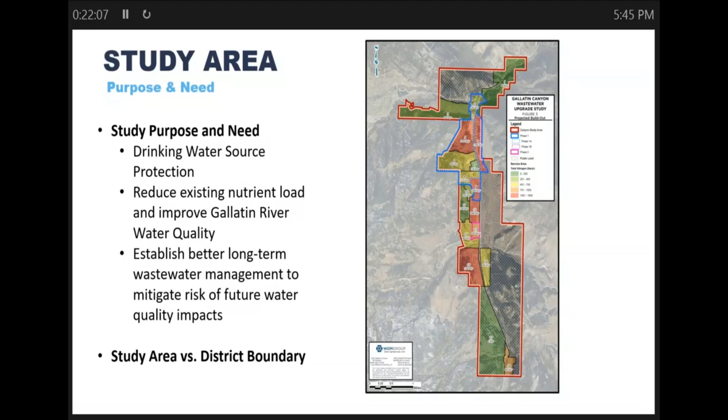I will circle back to our district boundary recommendations, but I'm going to keep it at the high level for now. The land use aspect of this, the main reason I'm presenting these stats is to show the nature of existing development. We had residential parcels at 262 covering 1,064 acres. That's roughly 1 per 4 acres, so very low density. The other stat I want to emphasize is this raw land. There's 4 large parcels totaling 575 acres.

The reason I bring those out is for comprehensive high density development, it's really those raw land opportunities that can facilitate a smarter growth strategy, where these 262 parcels, if they're already divvied up, the opportunity for best use of lands and water conservation and reducing sprawl, those opportunities tend to go by the wayside once they're subdivided and dissipated.

Permitted systems, we took an inventory of Gallatin County database, had 62 permits at 113,000 GPD. They let us know that they probably didn't have everything. They did have the big systems, the community systems, and I'd say 90% of the flows and loads are probably in 10% of the systems. So their database had the big ones, but we did some ground truthing through primarily aerial imagery to up that to 125 total systems, up to about 115,000 GPD flow. Based on average day flow and load estimates for those, we're calculating about 4,600 pounds per year nitrogen going to the aquifer.

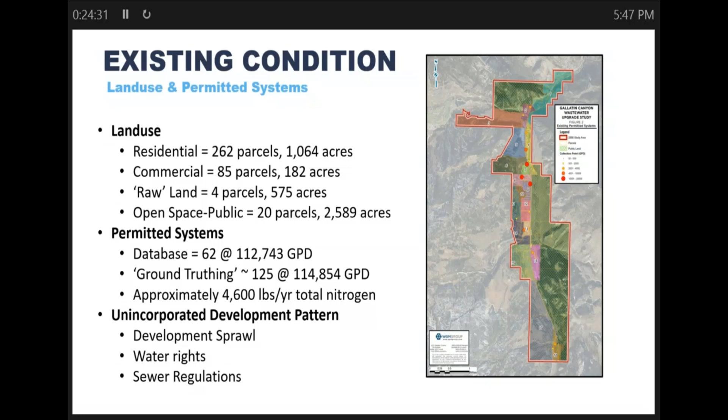This is building off that 4,600 pounds I mentioned to you before. We're kind of throwing an error bar of about 1,000 pounds per year, saying it might be as low as 3,600, might be as high as 5,600.

I'm getting a 5-minute and I need to cruise.

Recognizing there's a lot that goes on in the aquifer. There's denitrification, there's dilution, there's aspects that may drive that number down, but there's also loading aspects of systems performing poorly that could drive that 4,600 number up. So we've got an average day flow on those permitted systems estimated about 97,250 GPD. Existing load, and what we're here today is look at ways to reduce that load, ideally cut it in half or more.

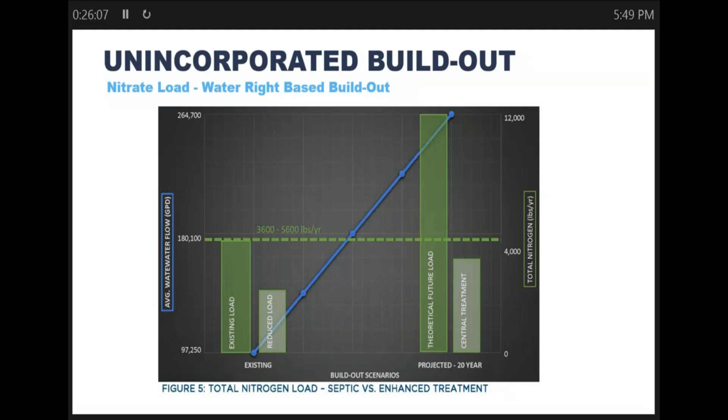Under a projected 20-year build out, again, this is unincorporated, so we looked at water rights and how that really limits your max growth potential. There's still substantial growth potential, but we calculated about a cap at I think it was 264,700 GPD of growth, so double to triple the potential of existing conditions, but recognizing that water rights do represent a fundamental cap in this canyon. In my interpretation, unless water right regulations change in the future, or if we get creative about how to navigate it. But under an unincorporated growth scenario, you're looking at upwards of 12,000 pounds of septic systems going to the aquifer. Whereas in the central treatment, you can handle that growth and ideally mitigate to below existing loading.

So, growth projection. This growth projection serves as kind of our basis of design for infrastructure. Permitted flows, as I mentioned, roughly 115,000 GPD. We looked at various metrics for growth. The 2008 study identified X number of permits at X GPD, and we compared that to present day. And based on a permitted situation, 3.8% growth in the canyon area.

Looking at Big Sky Water and Sewer District stats, their last 5 years showed about 7% growth on an SFE basis, single family equivalent. On a flow coming out of their plant, they're showing about 5% growth, so 5% flow growth. So we landed on a design flow using a 20-year projection, going 5% off of the permitted flow. I would argue that permitted flow is roughly a max day estimate, so we're conservative on our base because that's kind of a larger number than average day.

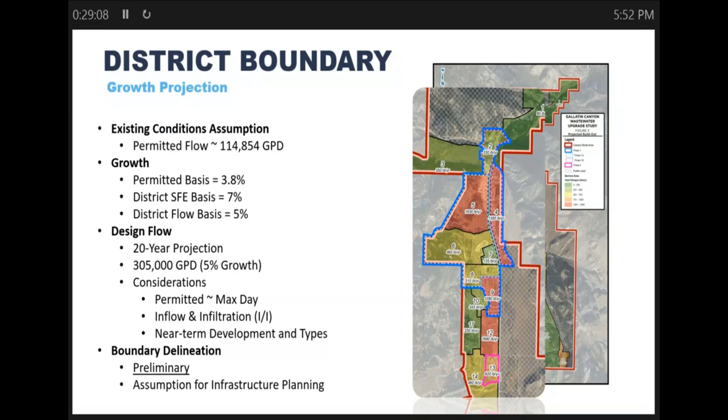We identified some raw land areas that have some near-term development planned. And again, we're trying to grab some of the larger existing loaders. The red area generally shows where either near-term or existing loads are concentrated. And it's a balance of cost of collection versus how much you're pulling out. And that's kind of our basis for that preliminary district boundary recommendation.

From there, I'm going to introduce two scenarios that Scott will elaborate on. Scenario one is really a go-it-alone scenario, a canyon treatment plant somewhere in the north end of this zone. Scenario two, I call that the co-solution with Big Sky, the existing Big Sky district. And the strategy there is the sum might be greater than the parts. They've got an existing plant, they've got existing storage, they don't have great disposal options, but they have excellent treatment. So that plant, those benefits potentially create a win-win solution.

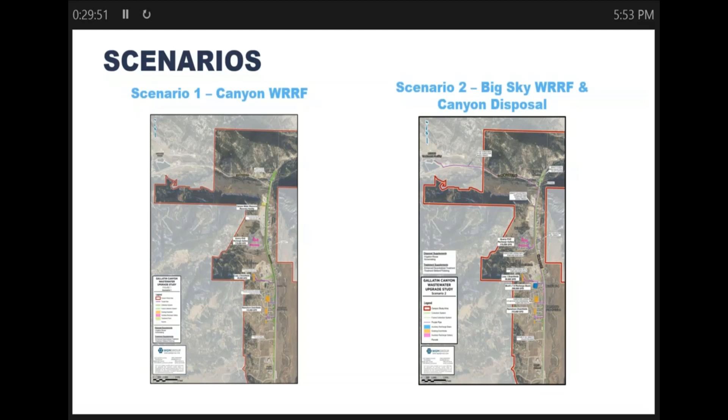I think I am ready for our first set of questions. Great, so we're going to take questions after each section. As Mace said, he's going to take it. We're just going to do this for a few minutes, but there'll be more opportunities at the end to stand around, talk with us, look at the maps. Thanks, Mace. You want to take it? Yeah, and if there's no question, I'll move on.

But go ahead. I'm just wondering, because it's not clear on the map, where you project the southern end of the boundary will be. So again, we're kind of identifying... This is showing projected loads on a 20-year growth, but we do know on our existing loading map, the Ramshorn subdivision has a notable density. They're actually the higher density development area for residential. Some existing commercial loads, old septic systems along the east side of Highway 191.

But right now, that's kind of our phase one concept boundary, but planning for in the future having adequate collection to extend that boundary to, say, we're showing phase two down at Ophir School, recognizing that the school is growing at a rapid pace, and that'd be a logical phase two, or even rolling into phase one if the dollars make sense. And Mace, can you restate questions? Otherwise it won't record. Okay.

On the next one. So where on the map is Ramshorn? Ramshorn is this service area now.

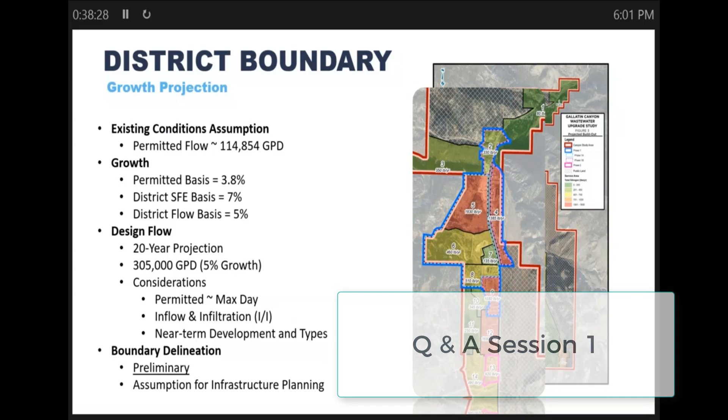So that's the transition to Scott's. I'm a map guy. Scott's a table guy, so be ready for it. That's not fair. Maps are way more fun than tables,

but I'm going to drag you through some infrastructure costs, and I want to talk a little bit about cost estimation beforehand. Just to say quickly, we'll give another one of these in early April where we'll take these infrastructure costs and these O&M&R costs that we're going to show you tonight and try to develop them into something real for you, which would mean connection costs, annexation costs, and what it means for you. So these costs are going to be for the total project and somewhat difficult to wrap your head around what that means for me if I want to join the district.

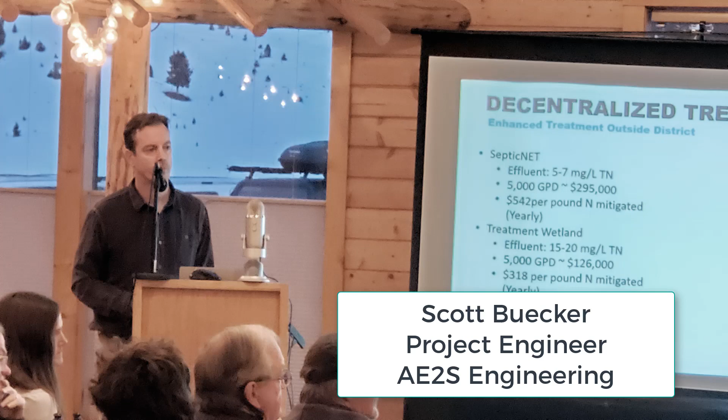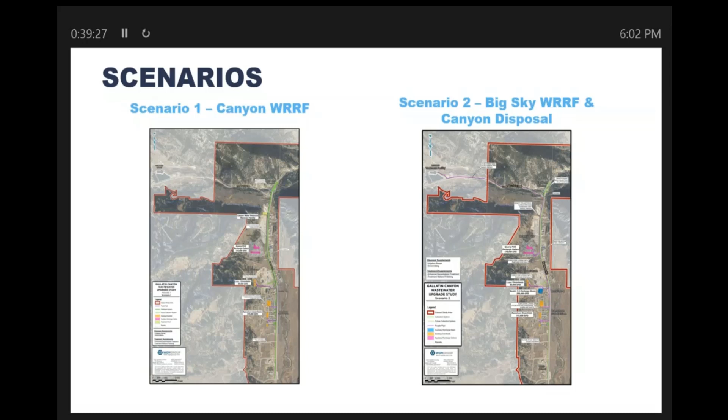But 2 scenarios. Scenario 1 is going to be go it alone, as Mace said. Think about that as one man against the world. Scenario 2 is joining, coupling with the district and pumping your wastewater up there. That'll ride throughout this presentation. Cost estimation. When I give you numbers, they'll be total project costs. So not just construction costs, but also the cost to design it, to permit it, construction admin, the whole 9 yards. Versus when we say construction cost, that's the cost you'd expect to see on a bid day.

Accuracy, we're operating under the Association for the Advancement of Cost Engineering. It's sort of a standardization of cost estimation. We're at what we call a level 4, a feasibility level, where we're not doing concrete takeoffs. We're doing parametrics, looking at recent projects that have been built. We are getting budgetary cost proposals from manufacturers of equipment when it makes sense. The level 4 standard allows me to say that my cost estimates are accurate to minus 30% or plus 50%. That's always been a hard pill for a client to swallow. We try to do a little bit better. In the report currently, we're saying minus 25, plus 35%.

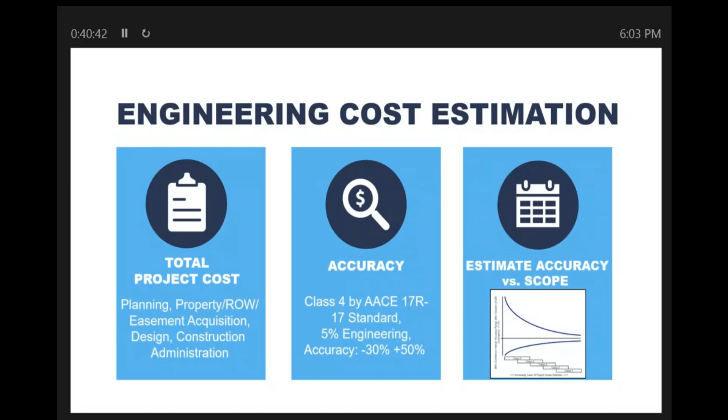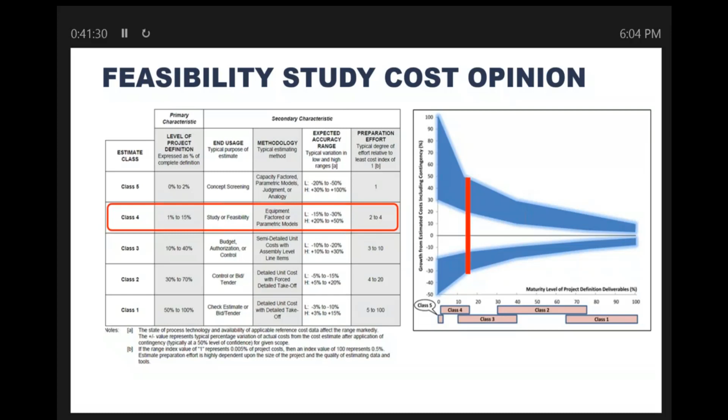And as time goes on, we're able to get more accurate, which is what the bars on the right are showing. This graph is showing your cost estimation band width as you progress through design. We're in these early stages here with about 15%, so our band is still pretty wide. If this project has legs, we'll go into a next phase, which would likely be a preliminary engineering report for DEQ submittal for funding application, et cetera. And we'll hone that in, with the ultimate goal being when we're putting projects out to bid that we might be plus or minus 10%. So you got to be patient with this process. It's not meant to protect the engineer, it's meant to protect the client from marching into a project that they may not be able to afford.

This is where we would be in the next phase, if this does have legs, if the vote on May 5th is successful, for example. Then we'll be able to start honing this in with better design applications for additional funding sources. This is large infrastructure that you're not going to finance with cash. You're going to get 20, 30, sometimes 40-year notes on these projects and finance them. And forming a district gives you that capability. If you don't form a district, you can't get that money.

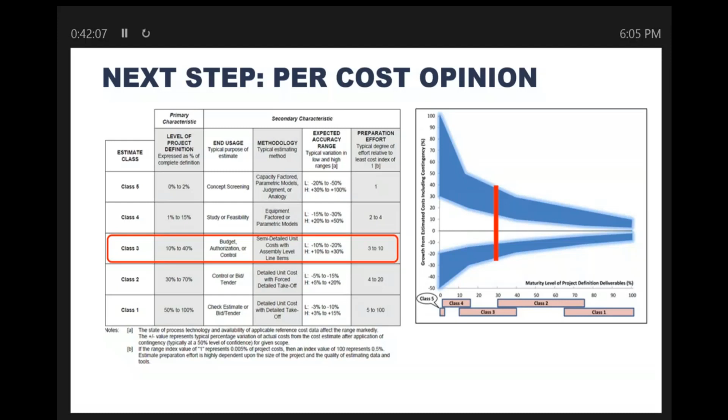So with that, just a high-level view, this is all going to be in the report if anybody's interested in the dirty details. But the canyon area collection system, roughly from about 1,000 feet north of 64 to capture Bighorn Center, with collection mains on both sides of 191, coming to a lift station somewhere in that vicinity of Bighorn Center, pumping underneath the West Fork through a bore and catching it on the south side of 64.

From there all the way up to Ramshorn and Ophir School District, we can do gravity. So, somebody asked about location of the treatment plant. Ideally, it would be around that 64 and 191 intersection, because then you can take advantage of all this slope that you have and not pump wastewater but once. And that would be, like I said, on the other side of the 64 intersection.

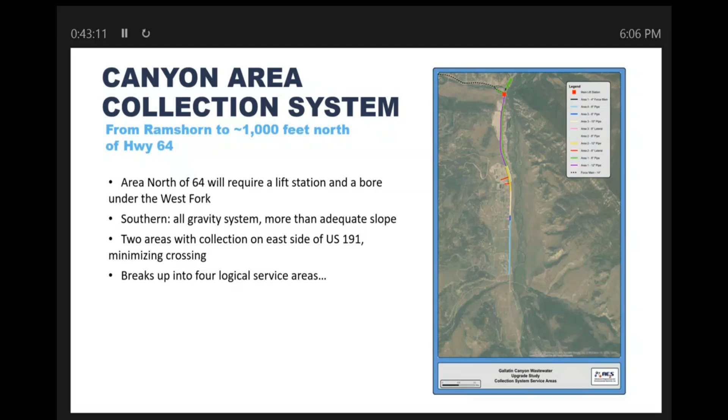It breaks up into sort of 4 logical service areas. Like I said, that first stretch, Bighorn Center, north to about the north end of Lazy J or Straight Iron Road. That segment's a little bit more expensive because it's a little bit more networked. It does have that bore, it does have a lift station, does have pipes on both sides of 191. So that chunk would be about, we're saying $5.3 million. And you caveat that with minus 25% plus 35%.

Each subsequent section is a little bit more inexpensive because it is gravity. We are not having to reach up into these hills a long way, so our laterals are not that long. These costs to me were pleasantly surprising after reading the 2008 study. It was all about 1, 2, 3 MGD sorts of wastewater generation and capacity and treatment, to where Mace landed, which looks like about 300,000 gallons a day. You've got peaks associated with that and such, but we're talking a whole order of magnitude smaller infrastructure, so it becomes a lot more tenable. And that was, to me, a very good outcome of the planning part of the study.

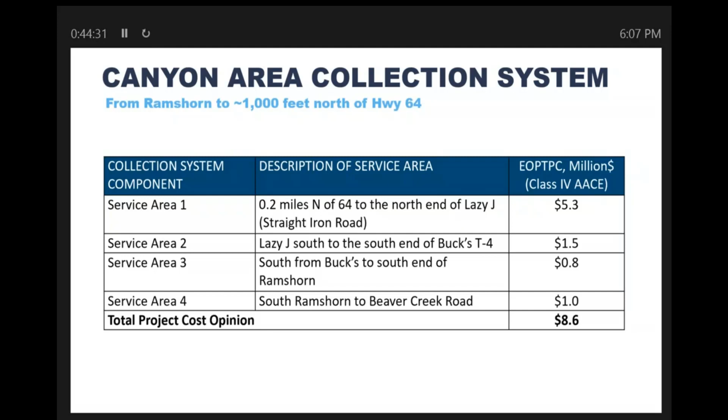And we can come back and spend more time on cost estimates later, but I don't want to belabor them, but I want you to see them. This is what we call OM&R, so operation, maintenance, and replacement costs. The replacement aspect is how you should be funding infrastructure, so you're collecting money over the years so that you have enough money to replace that infrastructure when it's expired or no longer of use. That's how Big Sky County Water and Sewer District does it. Not everybody does that, but that's a textbook way to do it. If you don't do it that way and you need $30 million of infrastructure in 25 years to replace what you had, you're at the mercy of USDA and SRF and state and federal governments.

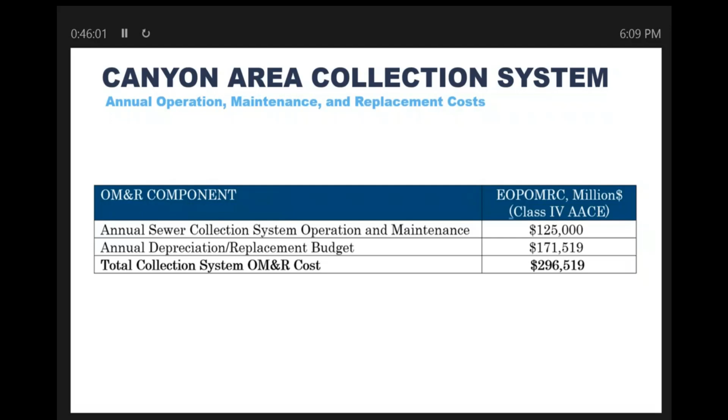The annual sewer collection system operation and maintenance. So this would be what the Canyon Area District would do regardless of scenario 1 or scenario 2. You would have a collection system that you would own and operate, and you'd have to pay somebody to operate that system, meaning go chase clogs, go do inspections, go do periodic cleanings, and that's the bulk of that $125,000 there. The annual depreciation and replacement budget would be about $171,000 annually that you would want to sock away so you can replace infrastructure when it starts to fail. So your total is just the sum of those, and it's about $300,000. These numbers might move a little bit between now and when we stamp this thing and put it out, but we're generally pretty close. We're not expecting any large swings at this point.

So that, everybody clear, covers the collection system that would be the Canyon Area District's. No interaction with anybody else. But what you do with that wastewater after you collect it and get it roughly to that 64-191 intersection, there's two options. One is you build your own treatment plant as close to that intersection as possible. The upper right photo is the River Rock wastewater treatment plant that Ron operates. That's about a 200,000 gallon per day system. We're talking about a 300,000 gallon per day system, roughly in that same ballpark scale. That might be what it looks like at the end of the day, just to wrap your head around that.

It is Big Sky, so we need indoor facilities, we need odor control, we need nice architecture. So costs do tend to be a little higher up here, not just for that reason, but because it's really hard to get at all these trades and get good competitive bids from contractors that are capable of building this type of stuff.

This would be owned and operated by the Canyon Area District as well under scenario 1. So you are taking on wastewater treatment for perpetuity at that point, really. Unless one day you decide to pull the plug and you can work a deal with Big Sky at that point to take your sewer. But you're staffing this, you're operating it, you're signing the discharge permits monthly, it's all yours.

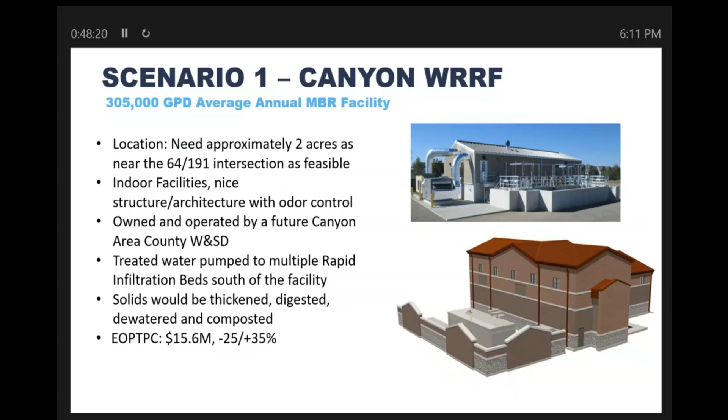When you see this EOPTPC, that is engineer's opinion of total project cost. We're sitting at a little over $15 million for that facility right now. Where that site ends up and whose property and how much we'd have to pay for that property is a big piece of that. So just keep that in mind. That's why we have some of those large accuracy bands at this point.

We chose the membrane bioreactor. That's where we landed for the phase 1 expansion of Ron's plant. It makes a lot of sense at this scale. Like I said, that River Rock plant's down there cranking out some great high quality water. It works really well at this footprint.

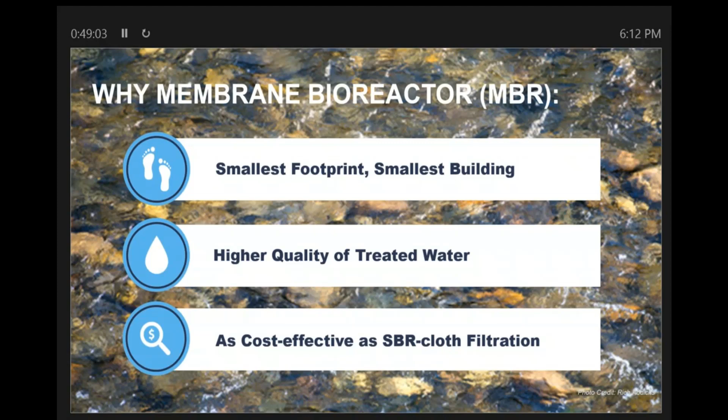You can get it indoors, and you can do just about anything with that water in terms of reuse. After you're done, it's a Class A-1, so it opens up all sorts of uses, from snowmaking to irrigation to putting it in the ground potentially. And it came out about as cost effective as SBRs, which is what Ron has now, backed by cloth filters, which would be more difficult to operate.

Scenario 2, conveyance to Big Sky. So this would collect all that wastewater down at a lift station that, if it all works out, we put out in the front yard there of Conoco. We've talked to them. They're open to the concept, but this is not set in stone either. This is just feasibility level study. So we'd have to construct a lift station there that would take Canyon Area wastewater and pump it up to the Big Sky County Water and Sewer District through a force main.

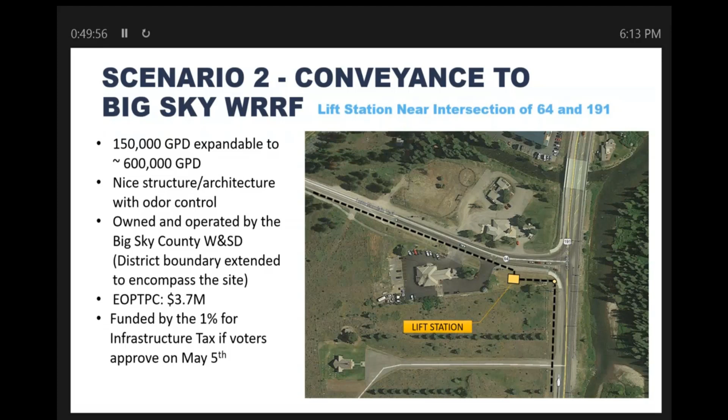The opinion of cost on that right now is about $3.7 million, still within that same bandwidth that we've been talking to the resort tax about, $4 million. That's all going to get asked of the voters to approve for collecting that with the 1%, and this lift station would be paid for if the voters approve.

The force main would be a 12-inch main at this conceptual design level, about 9,600 feet up Highway 64. That would be owned and operated as well by the Big Sky County Water and Sewer District, same as the lift station. That was part of the interlocal agreement with the resort tax. More detailed alignment study would be needed in the PER, but this is good enough for conceptual level cost estimation. And that would also be fully funded if the 1% additional resort tax is approved.

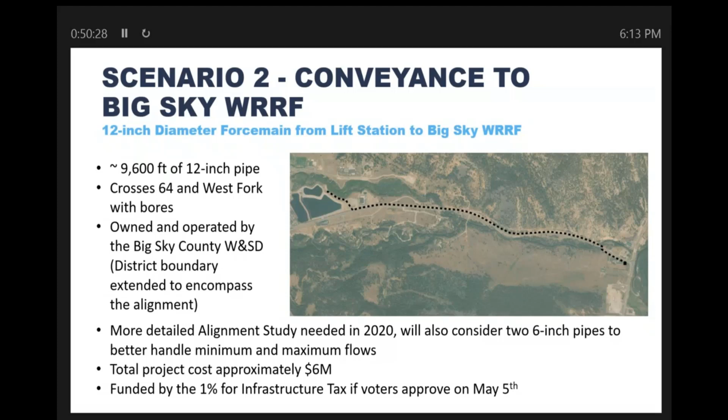Switching gears to the treated water, and I'm going to cover both of these because they're on the same slide. Scenario one, where the canyon goes it alone, as I described, we would pump treated water from that treatment plant back up the canyon to rapid infiltration basins and reuse. If you formed a district and had an agreement with Big Sky County Water and Sewer District to take the wastewater and treat it, you would have effluent treated water coming back down the canyon.

That line would be a 16-inch line with the goal of preserving as much of that pressure as we can and drive it back up the canyon for discharge to those same rapid infiltration basins and reuse sites. So bigger pipeline, but to cut down on friction losses and save the pressure and not have to have booster stations along that pipeline.

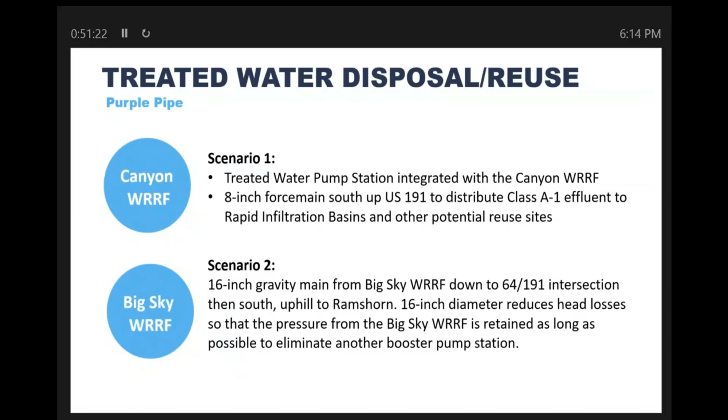Conveyance costs, so like I said, $3.7 million on the lift station, $6 million on the force main up 64. That treated water return pipeline, 16-inch, would be approximately $10 million. It just happens to conveniently break out as about $5 million for the portion along 64 and $5 million for the portion up 191. So what we told the resort tax 2 months ago was $12 million total as a budgetary number for the lift station and the two pipelines.

We're still about right there. That still works. And that's what will be put before the voters on May 5th, as well as funding 60% or $27 million of the expansion and upgrade up the hill. I'm getting waved out of here, so I'm going to quickly wrap up.

Then OM&R costs for those same infrastructures. So these would be owned and operated by Big Sky County Water Sewer District, but you form a district down here, you have an interlocal agreement, you're paying them, in an ideal world, what it costs for them to operate that system. So that would be part of your canyon area residents' rate charges.

And like I said, this is all going into the goal of feeding these infrastructure costs and these OM&R costs to the financial folks, who then will look at how many residents are down here, how many connections, and try to turn it into connection fees and monthly rate charges, so that you all can actually say, well, what is this really going to cost me, not what's it going to cost in total.

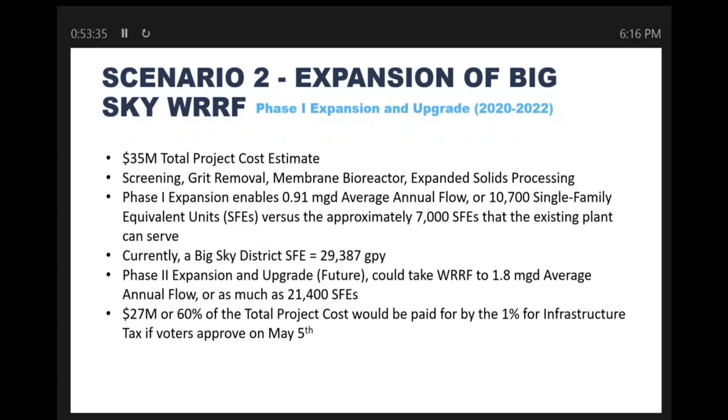Ron's plant, most of you in this room have sat through a presentation I've given already, so I'm not going to touch on it, but we're sitting at $35 million on the estimate. Again, resort taxes said we'll pay up to $27 million or 60% of that project cost. And that was done in large part to say, we will help you quite a bit, but we'd like to see you help get the canyon sewered and get their wastewater out of the ground and treated. That's just the latest rendering of Ron's plant. So that's what a $35 million project looks like.

I know I'm getting waved out, but this is the thing I want to harp on here, is that, as we'll show toward the end, the capital costs of these two scenarios are pretty darn close. If you were just looking at that, you might say, well, hey, we could build our own plant and operate it. The issue is that there's huge economies of scale in not just construction of wastewater and water treatment plants, but in operations. That first line item, for example, is full-time employees, operators.

You can't really have one operator of a plant that's trying to generate Class A-1 wastewater. You need two. What if that one goes on vacation or gets sick? In theory, we like to do circuit riders and back each other up and share operators, but you can't plan for that at this stage. So we budget 3 down here for Ron's plant. He's doing it right now with a lot less, but by the book, that plant, when it's expanded and upgraded, would have 3 operators dedicated to it. But it's 3 times larger, but you only need 1 more person. So those are the economies of scale that I'm referring to. Same with energy and everything else.

So right now, sitting at an estimate of about $800,000 a year to operate that 300,000 gallon per day plant that would be the canyon's, versus maybe $1.8 million to operate that future expanded plant that Big Sky County Water and Sewer District owns and operates. But they've got 7,000 SFEs up there to help you share that cost load, versus down here, you're doing it all on your backs, fewer backs. And that project needs to be built and financed from the get-go. So however many people you start the district with are going to have to bear that load, and you're going to be wanting more people to come on board to help you bear the costs.

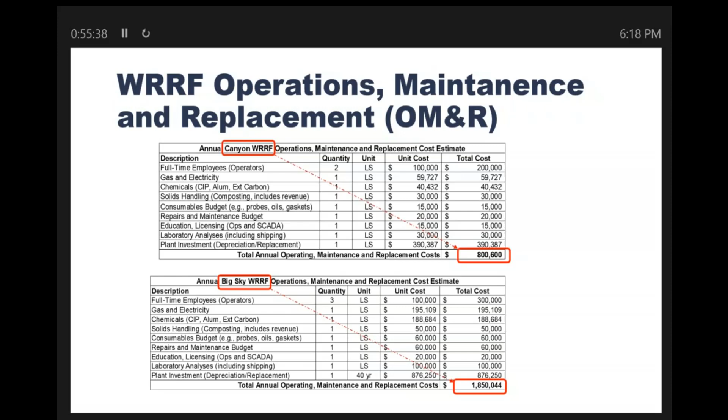That's it. Question? What's the question? Why not expand Big Sky County? So the question is, why create a separate district and not just annex them in?

And it really is kind of a political answer. The annexing district is totally outside of our current boundary. You have to do a vote of my entire district customer and owner base, which becomes very difficult to do. And so you put that out to a vote, and you may get, no, we don't want to annex them in. If the canyon decides to form its own district with an initial list of landowners, it's a much easier thing to organize and set up.

But it's a good question. Questions for Scott? Or Ron? We're happy to let Ron answer all the questions.

Over there. Scott, can you talk a little bit about disposal sites within the canyon? What those might be, what those needs would be? Yeah, especially because May showed one right out back here. We caveat that quite a bit in there. There are many here already that we're hoping we could take over. And when I say we, it would be you, the canyon area, versus going and building a bunch of new ones. Some building of new ones, there looks to be plenty on paper.

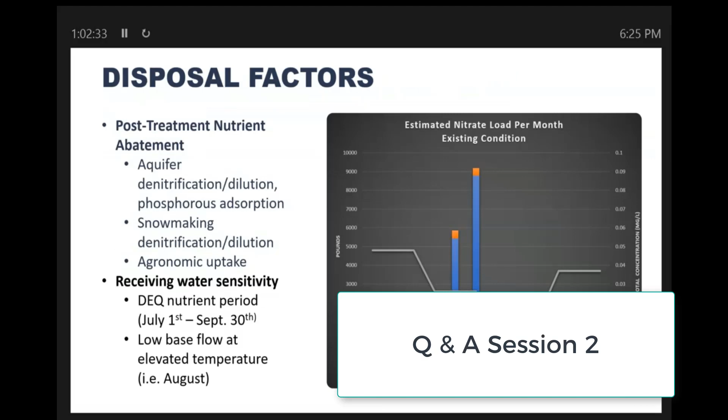That's why. The first slide where you said it was $5 million for that section, because then later you said the pump station up to the sewer district was $1 million. No, sorry. 3.7 for the pump station, and that's because it's on that triangular wedge in front of Conoco. It's going to have to be really nice and look nice.

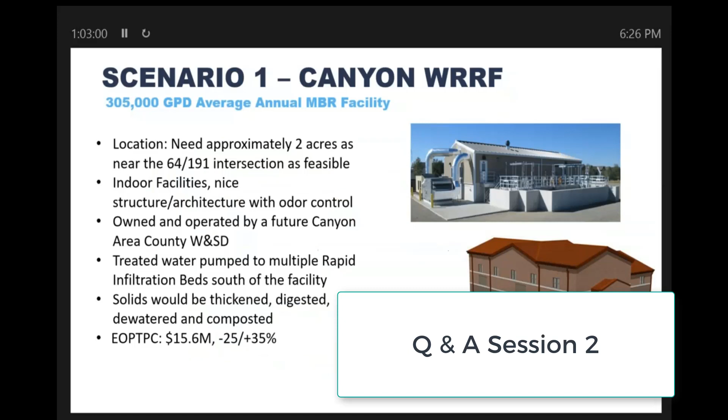And so I guess I didn't understand, but then what was the $5 million one for? Like one of your very first slides. The $5 million is for that first starter collection system, what we call service area 1 or area 1.

Hopefully Mason's going to help us out with summing this up. Yeah. Yep. Great expectations. Questions now, I can talk a bit about the maps too. And Scott, you want to briefly go over the decentralized, maybe, might be good for people. I'm catching that one too in a second. You'll catch it, okay, great.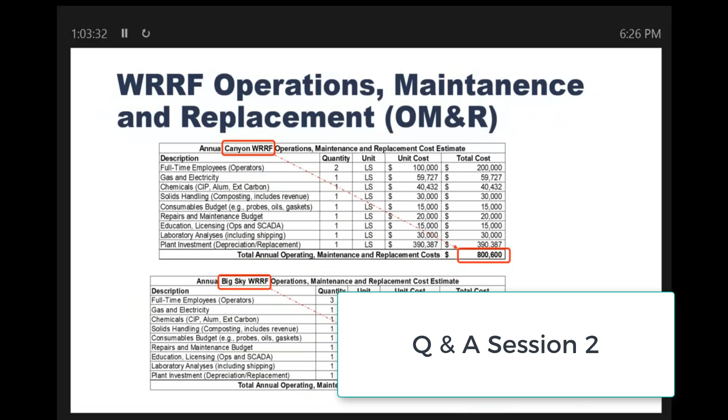Is there an infiltration system? What are options of that? Is that landscaping? The more you landscape it, the less capacity you have generally. The highest capacity would be a cobble rock drain bed, essentially. Well, I meant for using for irrigation. Like can we irrigate football fields at the school? Is that a use, or are you talking about injecting into the groundwater, and how does that happen? Both. We could do both. Putting it in the ground is going to require some more study and some more science, but irrigating ball fields is fine. That's done all over the U.S.

So I have a question. Is this required because of growth, not because of where we are? That gets to that whole discussion of tipping points. Are we a problem right now? We don't know. MBMG's launching in to help us understand that a little better. But as it grows, surely. And a lot of that's already platted. Are we at that point now? You're asking a treatment engineer. That's for the groundwater folks. We've seen increasing levels of nitrogen in groundwater wells in the canyon over time. So we're definitely having...

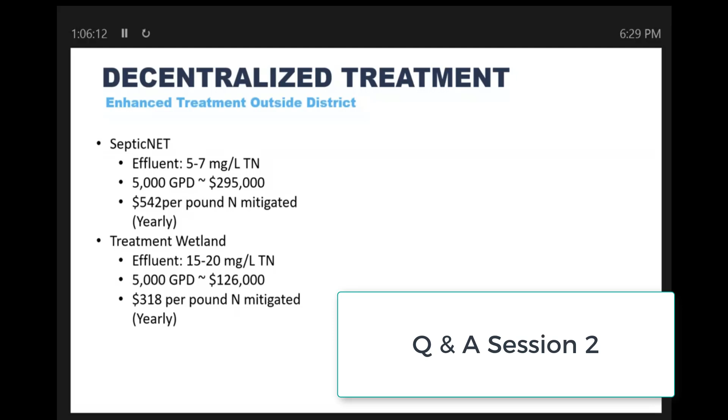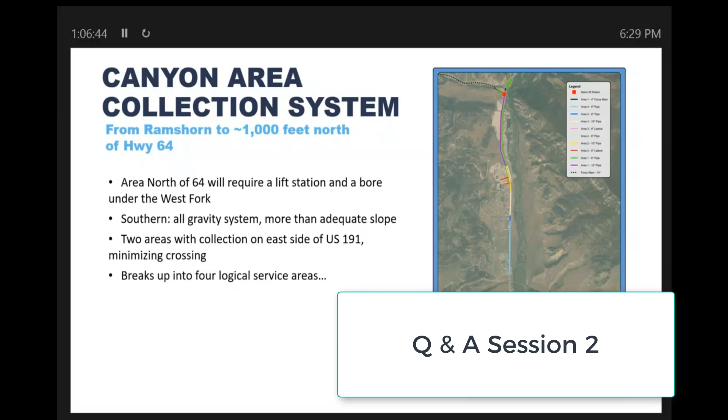Quickly scroll back and see if I can answer that service area concept. I don't know if I can quite read it. I would say that that 5 million number is roughly the purple pipe plus T4, I think, right here. That purple pipe to Bighorn is the base infrastructure that's totaling 5 million. So the 3.7, is that just the lift station or is that the pipe? Does it seem significantly further to get it on?

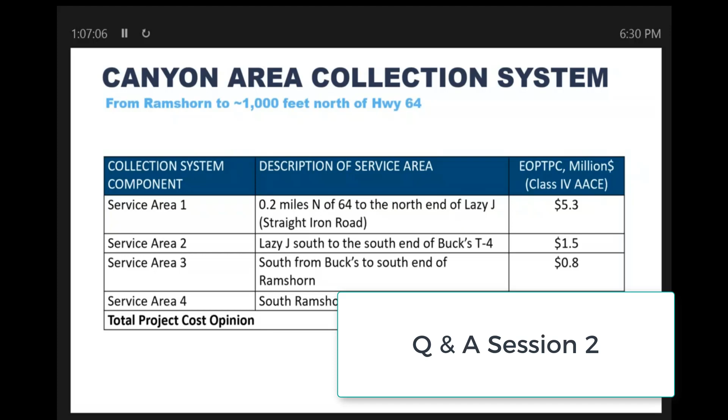So keep in mind that one set of costs was collection. This one's 100% collection, nothing above the lift station to Big Sky Wastewater. So that 3.7 is just for the lift station? Yes, correct. Like I said, that's a deep lift station right there in front of Conoco. It's a tough place to build on, and it would have to have nice architecture, odor control. We like to do dry pit lift stations where the pumps aren't actually submerged in the wastewater, so that's a nice lift station. But it is actually shorter from the intersection to the Big Sky County Water and Sewer District's plant than it is from that intersection to the high school.

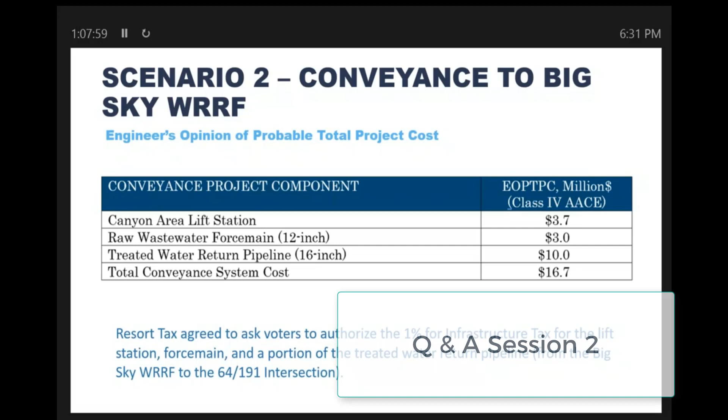It's tougher to install a pipeline in that 64 corridor than it is in 191, so that's why it's kind of a balance of 5 million each. If you're trying to track down that 5 million compared to the $12 million total, I will note that this treated water pipeline includes the purple pipeline from the intersection down to these disposal sites that I'll show you in a while. So there is a $5 million component that isn't part of that lift station conveyance back and forth.

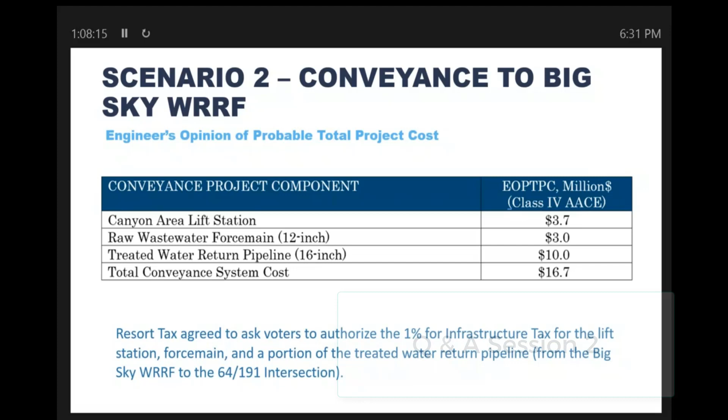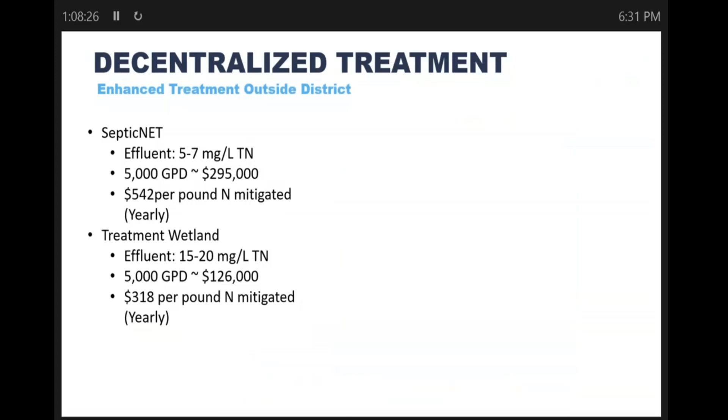So, decentralized treatment. We recognize that there's portions of this valley that are going to be very tough to collect, not economical to extend main. Corral Bar, Rainbow Lodge, every linear foot of pipe costs money. So to take chips off of these nutrient loads, decentralized treatment is a strategy. We did our homework on what we think are two solutions that we would vouch for.

On my drive up, I was thinking I should add a Montana made stamp because these are Montana technologies. SepticNET out of Butte. It's essentially leading edge, decentralized, non-mechanical treatment, getting effluent down into the 5 to 7 range. That quality of effluent comes at a cost. 5,000 GPD system, which I characterize as you'd probably need 5 of those for Ramshorn, 4 maybe, because that's all off a design flow, not average.

So it's not cheap, but it knocks out a lot of nitrogen load, taking essentially incoming effluent at 60 milligrams per liter and knocking it down to the 5-7 range. Applying it to this scale of system, if there's a 5,000 GPD standard system out there, you're able to knock out, I think it's in one of the tech memos, I think it was 800 pounds a year at $542 capital cost for that first year poundage, and you're knocking those pounds out for the life of that technology.

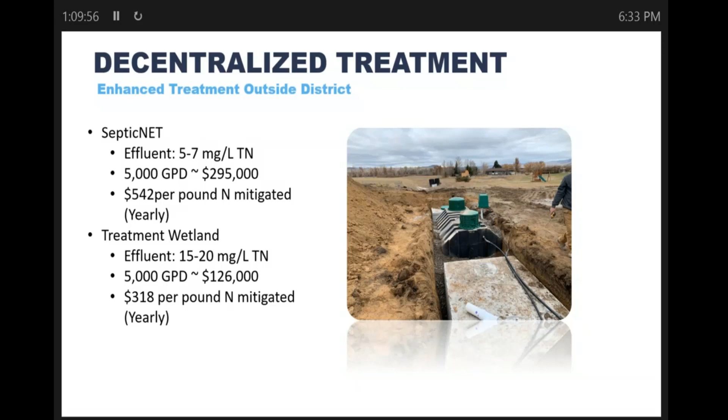Next Montana-made technology, treatment wetlands. Chris Allen, Otto Stein, they worked with MSU for about a decade, proving these concepts out. This is up in Bridger Bowl. It's about a 10,000 GPD system you see in the picture there. And it's worked under the harshest conditions of extreme ski hill loading in dead of winter, so coming in at high loads.

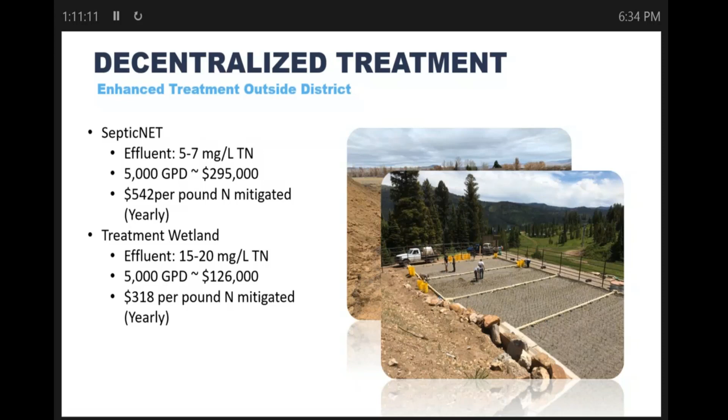For a district, it's not a traditional method of chipping off a bunch and having a district own a bunch of drain fields and decentralized. A district solution is really central collection, central treatment, and the quality of an MBR is 3 or 4, and you're setting yourself up for handling mass collection in the future. So that's kind of the differentiator between the two treatment concepts.

So I'm going to get into disposal now. Little rundown on this graph. This is roughly existing load. We did some mass balance work. We were looking at some stream data upstream of the canyon at roughly the Buck station. We've got this natural load concept of spring runoff carries some nutrients. You've got high flows. So this blue represents a natural load bar that climbs as you hit spring runoff, falls down, and hits kind of more of a base flow from August on.

The orange is the unnatural load, what we were tallying up as, if we take that 4,600 pounds, spread it across on a monthly basis, that's how it stacks up on the natural load. And in the existing setting, that load is basically a chronic load, so it is pretty equalized and loading the stream pretty evenly throughout the year. And the trouble point is really your late summer, August, September base flows where temperatures are high, and that's probably when you're likely seeing algae bloom.

So that's where the river's most sensitive to your load, and it is actually one of the flaws of groundwater discharge, is that it is a chronic load. But if you say we knock out 90% of that load, you're chipping that little orange thing to a sliver under existing conditions. So that factor of timing and load played into how we were looking at our disposal options.

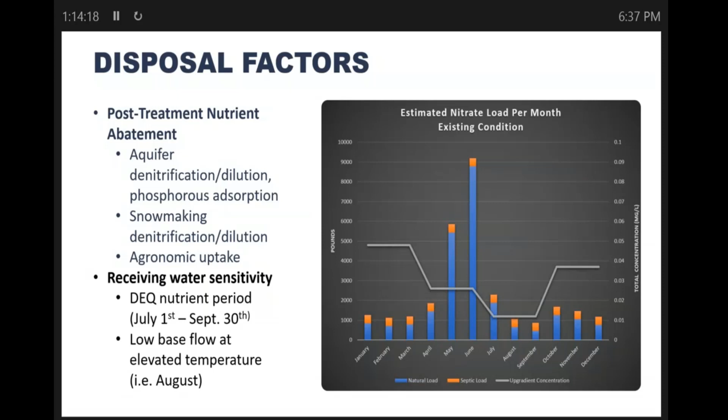I gotta keep cranking and I'll catch answers at the end.

This is our screening table. I'm not gonna cover it all, but I do want to emphasize we did look at surface water, we did look at groundwater, snowmaking, land application, deep injection wells, shallow injection wells. From an overall benefit, overall setting, we're thinking groundwater discharge is cost effective, has nutrient benefits, has recharge benefits, and at the quality of that, we're pulling X pounds out and putting less pounds in.

That's a plus. Supplementary, as Scott described, we're planning on a purple pipe main that essentially feeds these drain field locations. That main's available to use for irrigation reuse. Maybe there's opportunities where snowmaking's wanted for a cross-country course or for cross-country skiing, and there's a duplicate benefit. We did identify that snowmaking as a fundamental mechanism to dispose is maintenance intensive, operation intensive, and isn't a large reliable disposal. It can be done at a price, and if you get dual recreation benefits out of your snow, then it really starts to be intriguing. We're not taking it off the table. We see applications where it's supplementary.

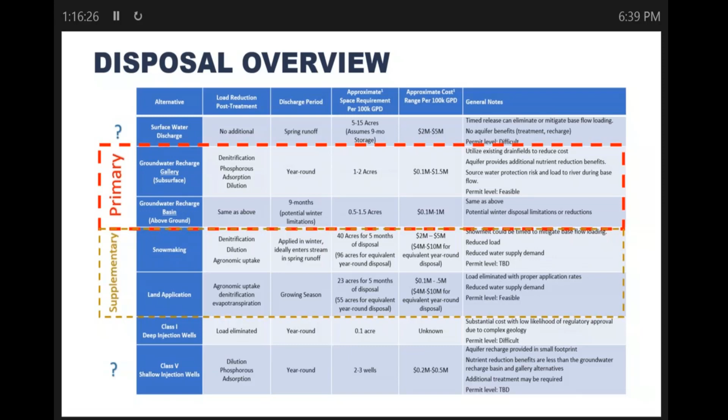Question marks on surface water discharge and shallow injection wells. I put those there as they're still intriguing to me. Surface water, not really in scenario one where the canyon's going alone, because that would require large storage to store through that sensitive period of the river. Whereas the co-solution, or scenario two, where the storage exists and you could potentially pulse discharge out with spring runoff, that's out of the system, 100% moved on. There are phosphorus concerns of, does that translate downstream? And that's the beauty of the aquifer, is phosphorus is eliminated. So still a cost-effective disposal if the storage exists. Pulse discharges, talking to DEQ yesterday, they seemed intrigued and saw the benefit, but point discharges through rivers are challenging.

Where am I at, Karen?

Okay. So disposal infrastructure, I'm going to present essentially both scenarios on the same slide. And like Scott mentioned, we're showing conceptual locations. So the fact that one of those is shown right out here off Bucks T4, that's purely conceptual, but we did identify all the orange as existing drain fields. Given the quality of this effluent, the loading to those drain fields can be approximately triple of what they can do today. Right now, they're trying to dispose of unpolished effluent, I'd say higher BOD, total nitrogen in the 20 to 30 range. So the loading to those is more conservative under current operation.

With the polished scenario, Ramshorn can send upwards of 115,000 GPD to those three drain fields. Lazy J has a system in place. We're calculating, I think existing, it's designed for 20,000. We're confident it can do 50,000. And then those would be kind of those first opportunities to use infrastructure to dispose of a lot of effluent without much cost. The caveat to that is piping to each of these drain fields is the big number in this whole disposal. And this is where that $5 million was actually in the collection system cost. So we've already captured that, but it is a notable component when you're looking at disposal.

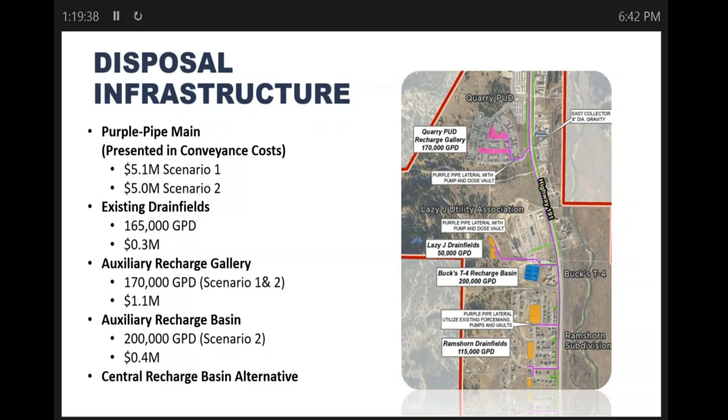But there's the beauty of getting it down to that southern end of the aquifer where it's broader, deeper, better recharge, and we're getting better distribution across this whole network. So to centralize it into a single location, yeah, there's a cost benefit, but it's a land challenge too. Take up a big chunk of land, and then it would be a more localized point source. So in our cost, we're basically going with this methodology presented on that figure, and the cost difference between the two scenarios is, I don't know if I tally that up at the end.

Yeah. So this is where we get into total cost. Focused on disposal, the go-it-alone is $6.1 million. The co-solution is $6.9 million. The reason that number climbs is the concept there is to take more effluent than is being sent up. So the Canyon is addressing some of the existing district's disposal challenges. For example, rather than pumping it all the way up to Spanish Peaks, which is energy intensive, let's gravity feed it down and still have a net nutrient reduction. So the number climbs, but it's also doing probably twice the work, depending on how all things shake out.

So as a total summary, this is capital cost only. We've got scenario 1 on the left. The boards are in the back. You can soak them up after the talk. Go it alone with a wastewater treatment plant. We're showing it roughly where Canyon Noble is, but somewhere at the north end is ideal. The co-solution scenario, more drain fields and sending effluent up the valley. The Canyon area treatment at $29.8 million capital cost. The co-solution scenario 2 at $26.2 million. So that's that total summary cost you guys were looking for.

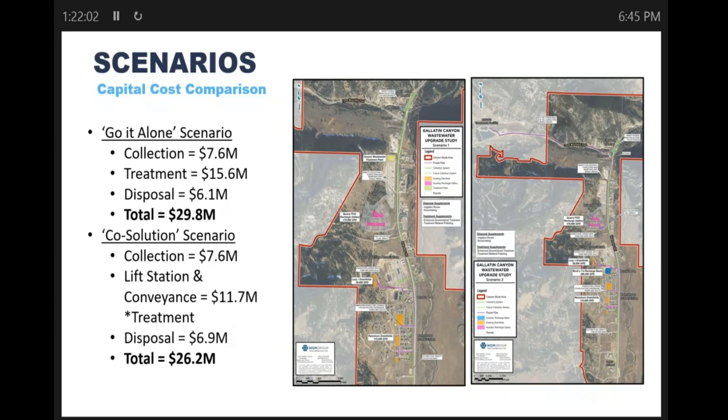And I think that was my summary, or essentially where I was stopping, but recognizing what Scott just said in terms of a rate study forthcoming to translate these capital costs to user fees under the whole funding package. A big chunk of that funding package is the upcoming May vote for the additional 1%. I did want to close out to emphasize district formation. There is an urgency, if this is going to get off the ground, it probably has to happen sooner than later. If developers start throwing infrastructure in the ground, septic or their own treatment plants, those are sunk costs, and those costs aren't there to help carry this district or set the foundation. And as those developments subdivide, forming a district may be a lost opportunity. So there is an emphasis on timeliness.

In the district formation tech memo that was posted on the website, you'll see that expedited formation is recommended. And if it delays a year, 2 years, I think central collection and treatment is going to be a tougher lift. So that's all I got.